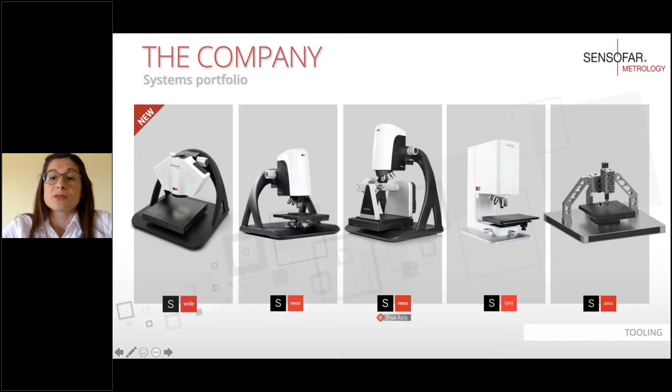We also have the option to work with integrable heads. The purpose of this is to integrate, for example, the S-Wide, S Neox Smart, or S onix into a production line. It could be, for example, in a machine, another machine, or a robotic arm.

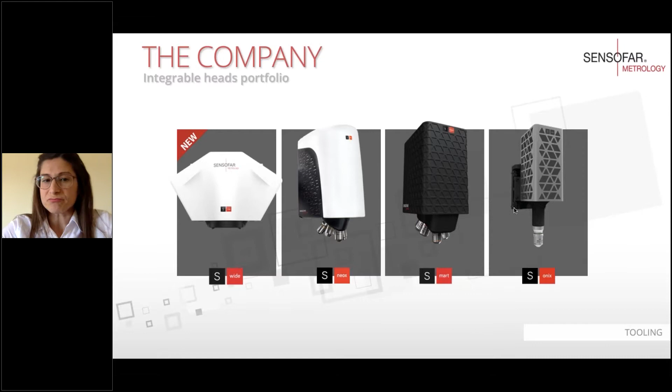So after this short overview, it's time to talk a little bit about the technologies we can find in our sensor head, and for that I'm going to focus on the S Neox. This is our confocal system, our flagship system. Here we can see all the evolution of the S Neox; in front we present the 5th generation, launched into the market one year ago. During these 20 years, we have been measuring and characterizing surface shape and roughness.

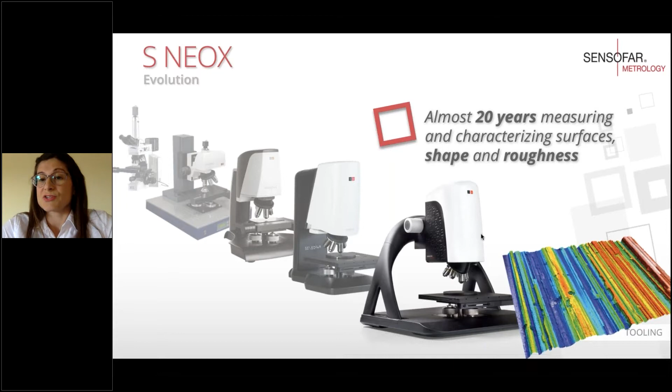How do we do this? We do it by using different technologies in the same sensor head: active illumination focus variation, confocal, interferometry, or spectroscopic reflectometry.

In the case of measuring smooth surfaces with slopes up to 86 degrees, or scattering surfaces, with a fast acquisition time reaching 200 planes in 3 seconds, the best technique will be active illumination focus variation.

But if we are more interested in obtaining the best lateral resolution, close to 140 nanometers, we will choose confocal. With this technique, we can also achieve speed measurement comparable to active illumination focus variation if we work with continuous confocal mode.

But imagine our interest is to measure features in our sample with system noise down to 0.01 nanometer, or measuring large fields of view with nanometrical system noise. No matter the objective we are using, we will choose interferometry.

Then we have the option to measure transparent films from 50 nanometers to 1.5 microns. In that case, we will choose spectroscopic reflectometry.

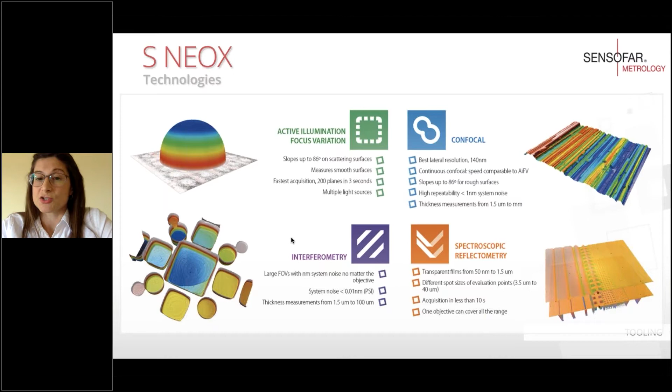Here we want to share with you a summary table. On the right, we have the different technologies found in our sensor head, and on the left, the features that may be of interest to measure. For example, if we want to measure high local slopes, we will choose active illumination focus variation. Or maybe if we want to measure nanoscale features, the best option will be interferometry.

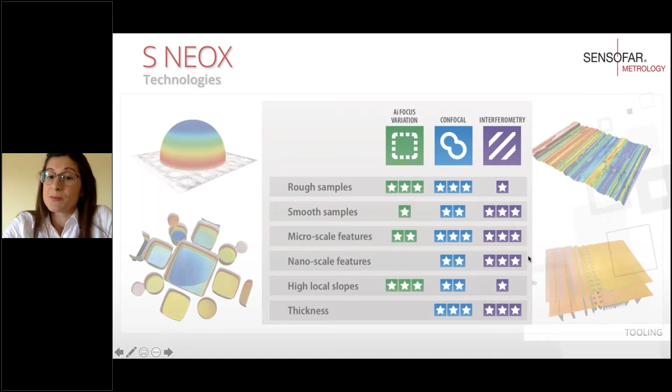Another thing which is important is that our system has a light source based on LEDs. In fact, we have 4. We have the red, the green, the blue, and the white. Why? Because this gives us more versatility to the system, and it is useful for measuring different reflectivities. Another benefit, for example, against the laser is that we can obtain less scattering. It has longer lifetime, and LED is cheaper if we need to replace.

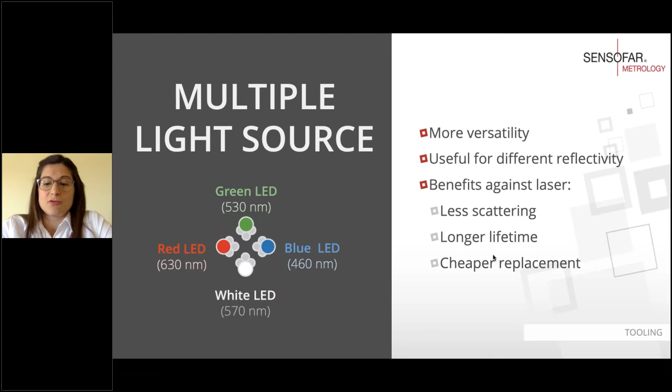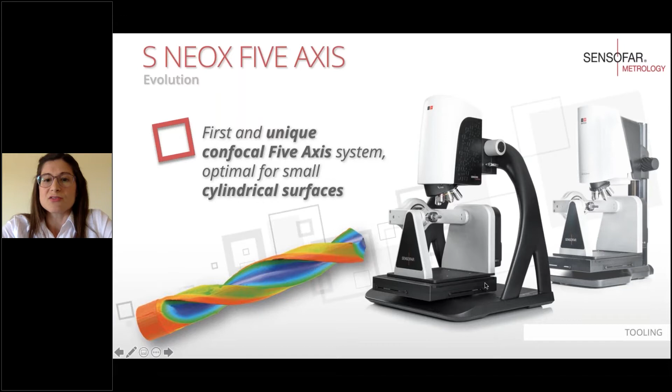So after that, we are going to explain a little bit which is the most used system in tooling application, which is our confocal S neox 5-axis. So this system allows us to measure the 3D shape surface of a part. Okay, we have here the sensor head, and here we have the rotational module. This rotational module, we can see here the detail. We have the holder, and here we have the part, our sample.

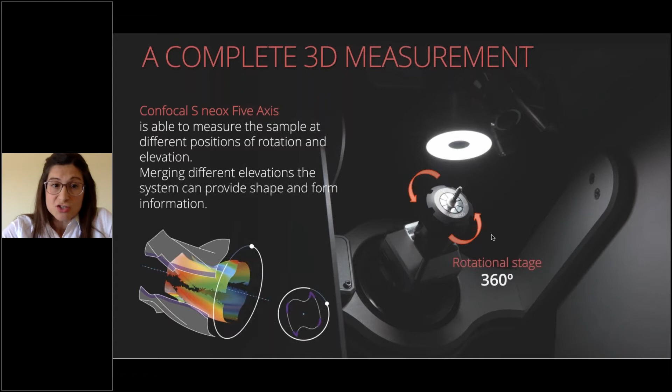So what we can do is to rotate in different positions and different elevations. For the rotation, we can cover 360 degrees, and for the elevation, we can cover 140 degrees. Then we can make the merge of different elevations for providing shape and form information.

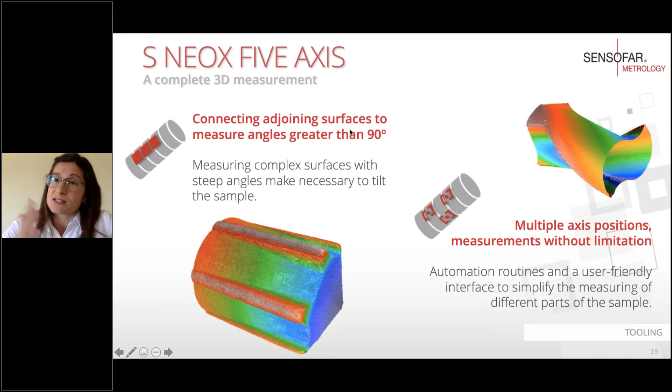So the software of this system has been designed with the idea to be really flexible. What does it mean? So for example, if we want to measure concrete areas, we have the option to go to multiple axis positions. We can create automatic routines. We can measure single points, single fields of view. Or if we want, we can measure complex surfaces with steep angles. We can tilt the sample, make an extended measurement, and then we can merge.

Another thing which is really interesting is that we can achieve cutting-edge radius down to 150 nanometers. And another thing that we don't have to forget is that our system has the 3 techniques in the same sensor head, and that we can achieve diameter of 350 microns in cylindrical shapes.

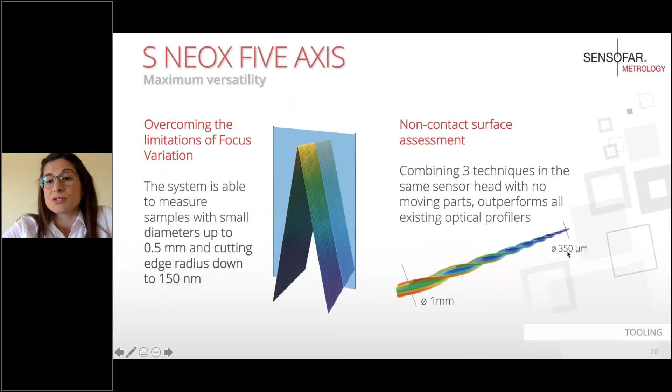So now it's the time to jump into the tooling application. So what is tooling? Tooling is a set of tools, especially ones required to manufacture a particular component, part, or assembly. There are many different types of tooling. I'm sure that maybe you are more familiar than me. So for example, we can say work holding tools or cutting tools for milling and grinding machines.

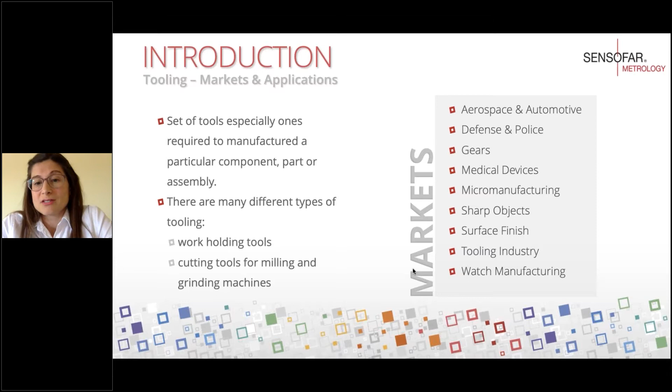If we talk about the markets, we can find tools in a lot of markets. For example, we can go from aerospace and automotive, and then we can go down to watch manufacturing. Here we have some examples that we are familiar with. We have the screws, the cutting tools, and the drills.

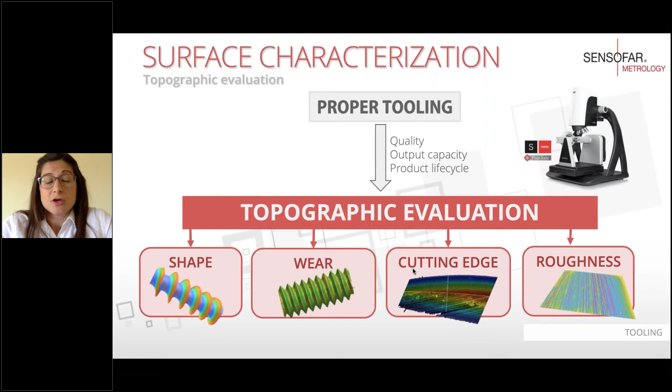So with our confocal 5-axis, we can perform a surface characterization. Why is this important? Because we'll obtain information from our tool. We know that a proper tool has a direct impact on the quality, the output capacity, the product life cycle, and the price. So here, from the topographic evaluation, we can obtain different information, such as the shape, the wear, the cutting edge, and the roughness.

And maybe you ask, okay, why do we have to choose Sensofar for these kinds of applications? Because with our confocal S neox 5-axis, we can obtain a full 3D shape. We can characterize this sample, and we have 3-in-1 technologies in the same sensor head.

How can we work with this system? Here I show you a really short workflow. It consists of 3 steps. The first one consists of defining the settings in the software and making the acquisition. Then we merge the topographies, and we prepare the data for its further analysis.

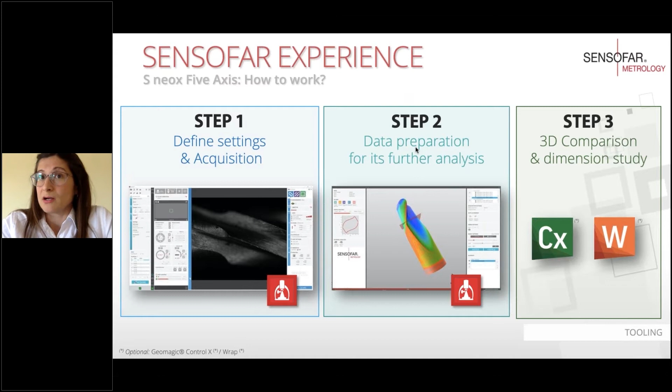In our case, we work with Geomagic Control X and Wrap for doing the 3D comparison and dimension study. But in the market, there are many other softwares that, if you are familiar working with them, are a good option too.

So here we can see a drill tool. This is the confocal S neox 5-axis. We have the sensor head, the bridge, and here we have the rotational module. Here on the right side, we see the detail with the drill tool, which is held in that region. We are going to obtain a full 3D shape with concrete rotation and specific elevation.

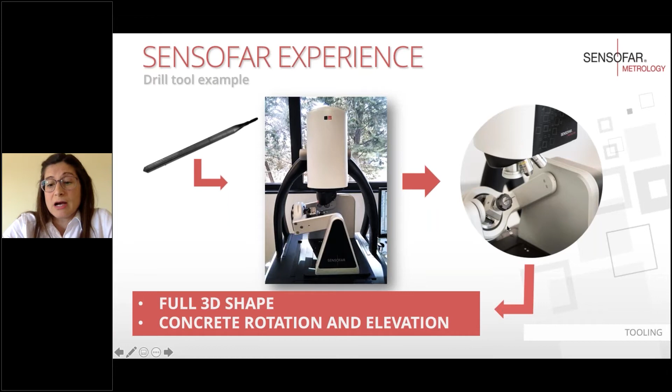So here we want to show you some examples of real measurements, and in that case, with the help of Utilis. Utilis is a Swiss company which has been focused for, I think, almost 1 century on producing, developing, and distributing high-quality cutting tools for machining, for watch industry, and for medical applications.

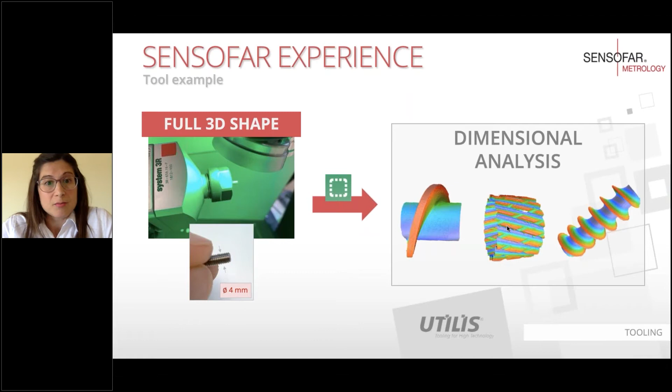So the first example is a screw thread. Here on the left part, we can see the part which is held in that holder. We have the option in the software to choose, for example, different measurement types. In this case, we have the sector measurement type. We can define a range of degrees in the rotational axis, and in that case, we use a 5x magnification, and we spend 6 minutes to cover 29 fields of view, and the measurement has been taken with active illumination

focus variation. Here on the right side, we can see the 3D reconstruction. We have a height in that flank of 1.5 millimeters, and in that case, we use the ring light to be sure that the light reaches this flank.

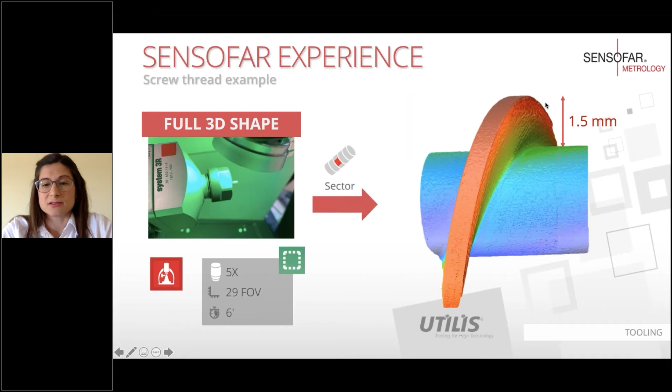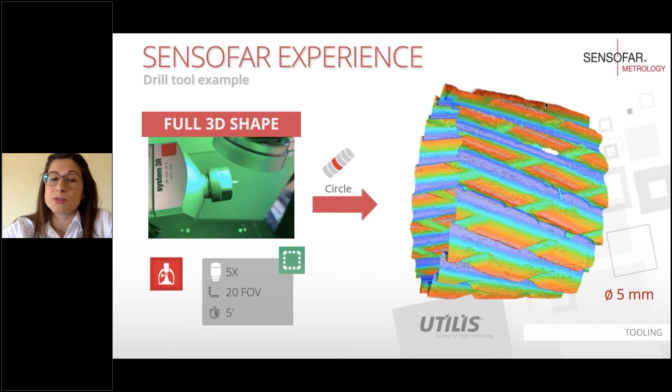The next example is a drill tool with a 5 millimeter diameter. In that case, we have chosen the circle measurement type. That means that we cover 360 degrees in the rotational axis. We spent 5 minutes to cover 20 fields of view, and we have used the 5x magnification.

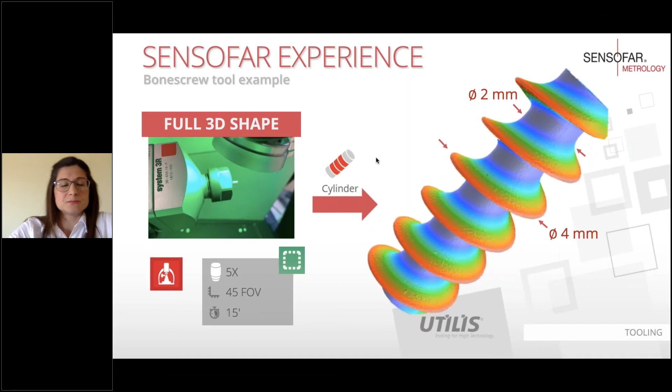This example is a bone screw. We can see we have the inner diameter, which corresponds to 2 millimeters, and the outer diameter corresponds to 4 millimeters. Here, in that case, we have the cylinder type measurement. We can understand this like we make a circle and then we extend the measurement. For covering 45 fields of view, we spend 15 minutes.

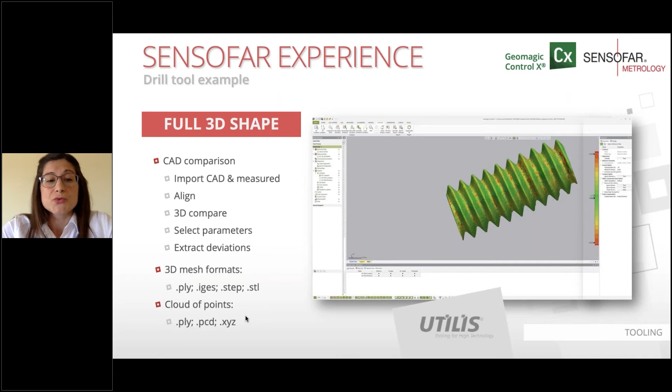So one of the things that we can do is to make a 3D comparison, for example, once we have the full 3D shape. And here we can select parameters and extract deviation. And one thing that we want to say is that we can export different formats, 3D mesh formats and also cloud of points.

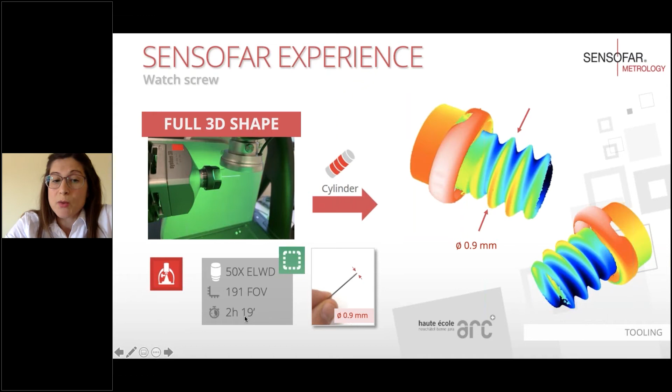And in that case, we choose the 50x extra long working distance lens to be sure that we reach these small parts. We spent 2 hours and 19 minutes to cover 191 fields of view. When we have the 3D, we can make a cross section, and then we can obtain different distances between different points, different features which are of interest.

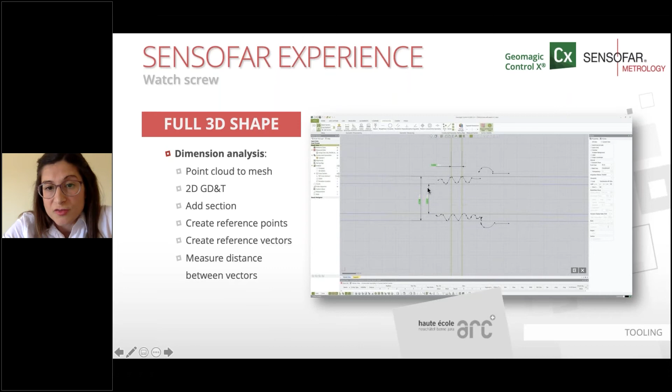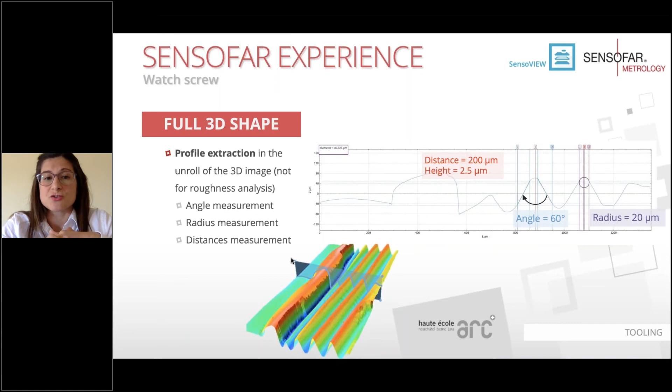Another analysis that we can do is profile extraction. If we have this part, the 3D, we can apply the unroll to remove the cylindrical shape, and then we can make the profile and we can obtain different measurements such as the angle, the radius, and the distances.

Okay, another thing which is important in tooling is the cutting edge. So why is it important to study the cutting edge? As we know, as tool wear increases, it may cause tool failure and contributes to increasing the manufacturing cost. So for reducing this and improving the production rate, it's essential to study the cutting edge. For this reason, it's important to understand how the cutting tool is going to interact with the unfinished surface.

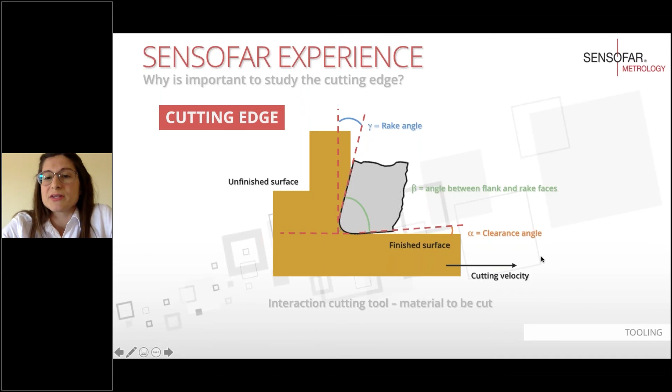Once we have the topography of our region of interest, we can analyze. We can analyze with SensoVIEW or with SensoPRO, for example. Both are proprietary Sensofar software, and we can say that SensoVIEW will help us to see in a fast mode how the topography looks. And then SensoPRO is another software which is designed for automation of the analysis.

We work with different plugins. There we can define different parameters that are going to help us to analyze the feature of interest. And then we can generate, for example, a pass and fail report if we have the tolerances of these parameters.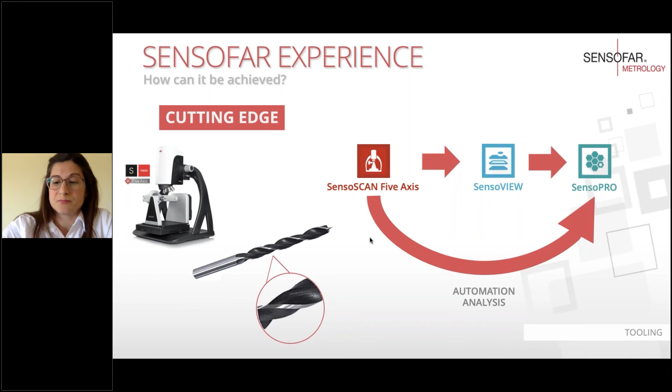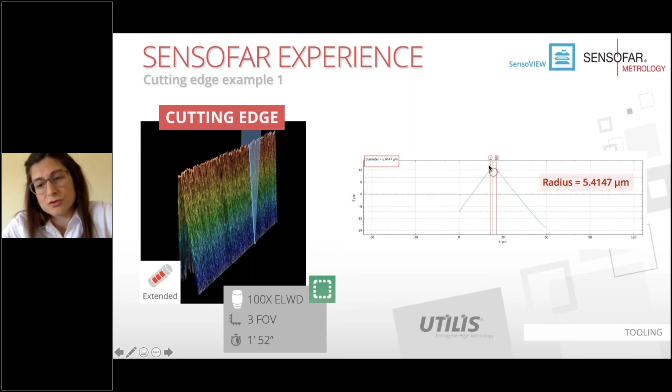So one of the examples of the cutting edge that we want to show you is the one that we can see here in this slide. On the left part, we have the topography of the cutting edge. Here we have done an extended measurement. Depending on the case, one field of view will be enough, and depending on the case, we'll need more fields of view. In that case, we work with 3 fields of view, and we use a 100x extra long working distance. Here we can see the profile that we can read with SensoVIEW, and we obtain a radius of close to 5.4 microns.

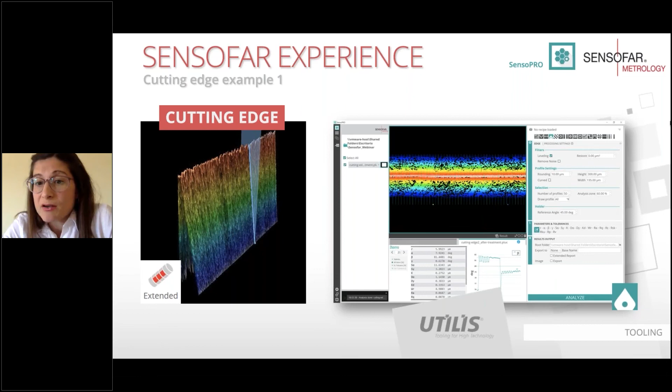But if we want to go to SensoPRO, I have here a screenshot of the software. Here on the top part, we have different plugins. We can do it under request of the customer. And here we have chosen the Edge plugin. We can see different parameters that define the feature that we are going to study. And here we have the parameters that are going to show once the analysis has been done. So when the analysis is done, we'll see this chart here with all the parameters and the statistical values.

And then we have here a single parameter, and this is the representation of each of the profiles that we have selected. Also, in the central part, we have the output view. This is the profile fitting with the cutting edge, and we have different parameters that are going to give us the information of this cutting edge.

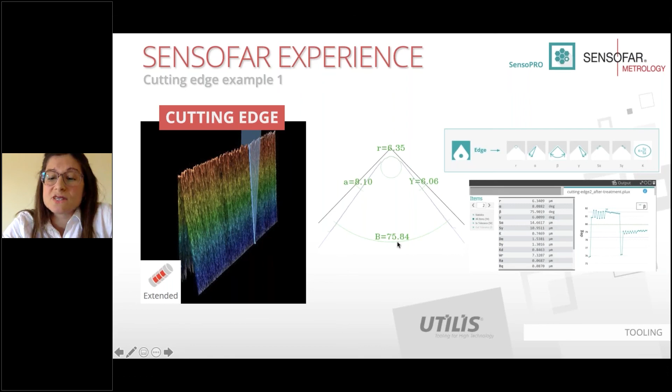Another thing that we can do is study the roughness. The roughness was in that region here, in that part, okay? The parameters correspond to Ra, Rq, and we have the average and then the standard deviation.

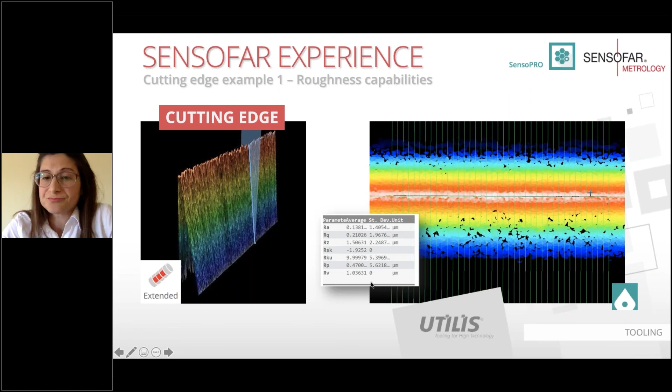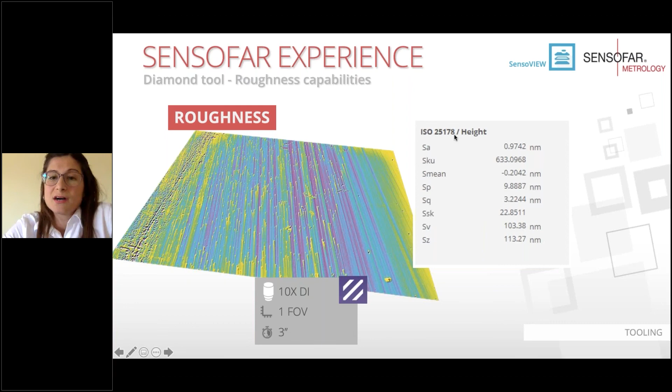And finally, just to give you the idea of what we can measure, thanks to the versatility of our system, is the diamond tool surfaces. We can use here the interferometry with a 10x DI, and with just one field of view and 3 seconds, we can obtain all the roughness parameters, the surface parameters of the roughness following ISO 25178, and that's all.